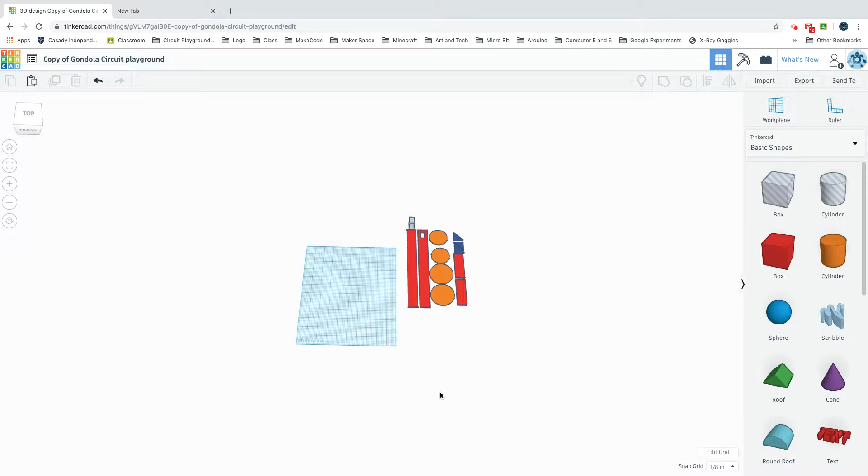All right, so this is a screencast on how to do the Tinkercad for your gondola. The first thing you're going to want to do is go into your edit grid, and you're going to want to change your units to inches.

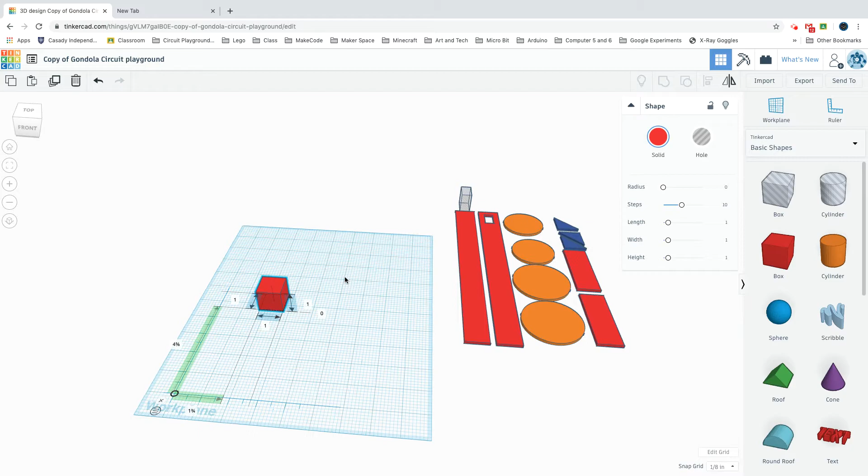Then I always like to drag the ruler in. That way, when you put things inside here, it gives you the dimensions right away. And since I need this to be laser cut, it's acting like it's going to be 1 inch high, but really it's going to be the height of the material. So in actuality, I like to change this to 0.1 for the height so that it's really small. Notice that you can click on these values right here and just type in the numbers that you need, which will be helpful later.

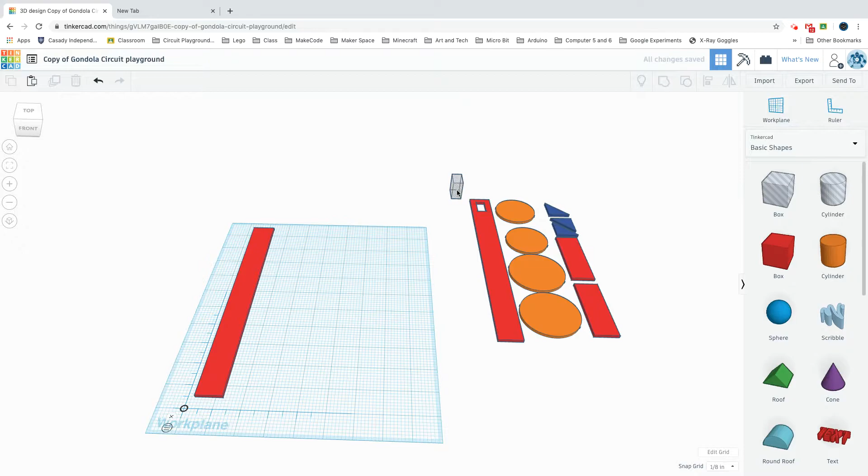So you need to make one of these that is 10 inches long and 1 inch wide. And then once you have that, you can make a small hole—those are over here, the box—or you can change it. These dimensions need to be 0.88 by 0.48.

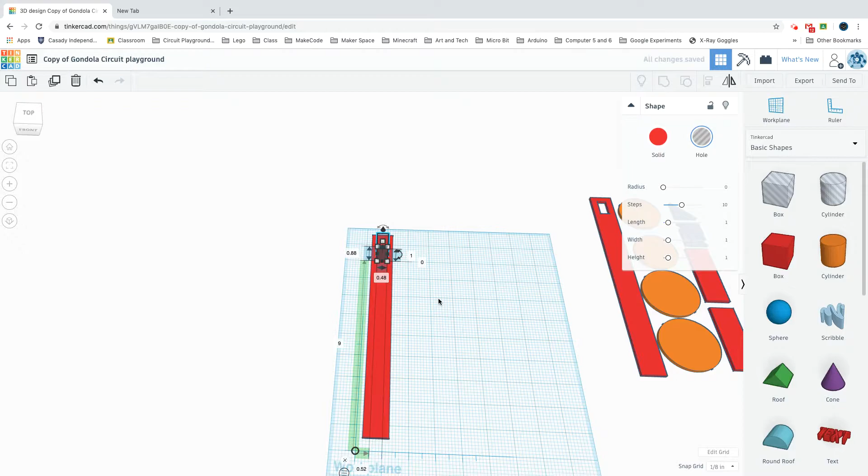And then to line it up, now you can hold down the shift key and the right click and move around like this. Or if you just hold down the right click, it moves you around like this.

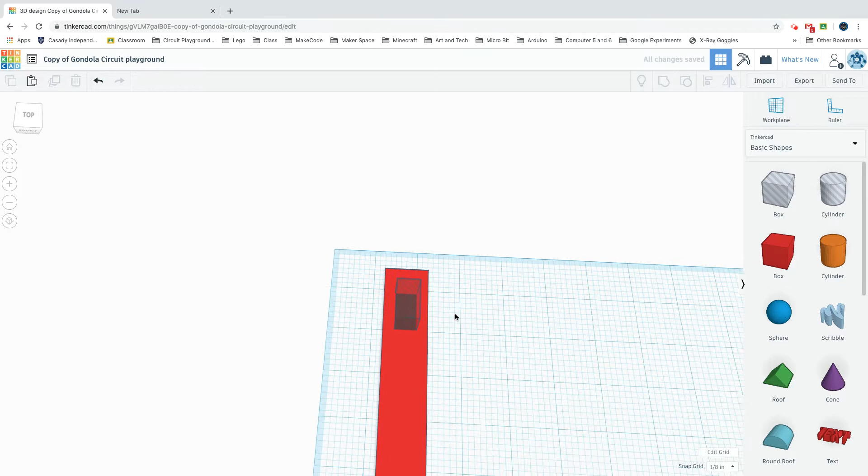And I'm going to come here and highlight these two, and I'm going to align them on the center so that it's where it needs to be. Then I'm going to give it a little bit of a gap here for that. And once I've done that, I'm going to group these together.

Once you have it grouped, you can hit the duplicate button and move it over, and now you have two of those. Then you're going to need to make a cylinder.

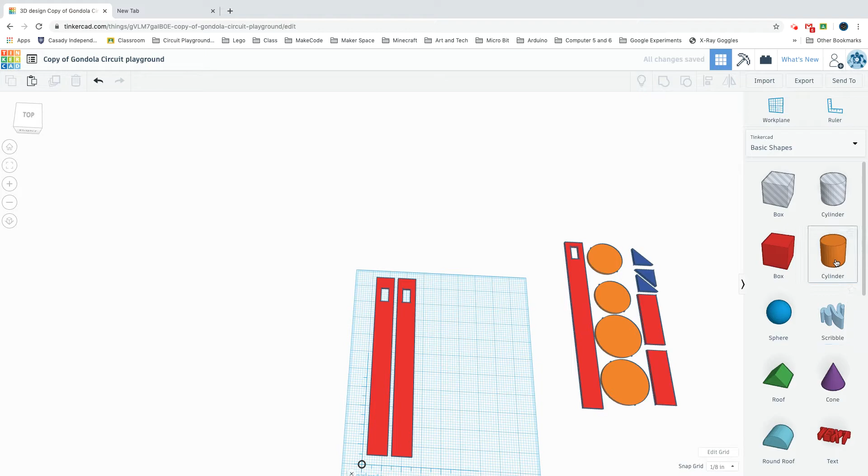When you drag in the cylinder, it's always a good idea to increase the sides up to 64. That way it's a smoother circle than what you'd have if you didn't do that. And then the dimensions on this, once again, I'm going to make it 0.1 high.

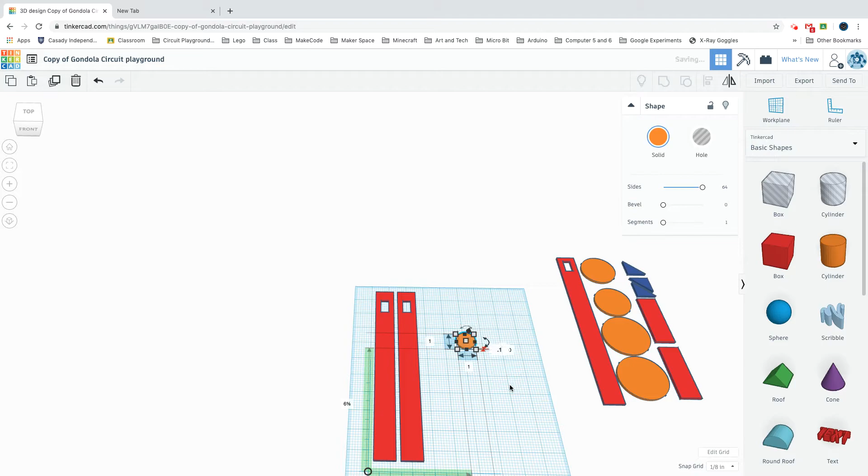And then you need two circles with the dimensions of 2.5 by 2.5. And then you need two more circle/cylinders that are 2 inches by 2 inches.

Then you need to make these, which are simply 1 by 3, and you'll need two of those.

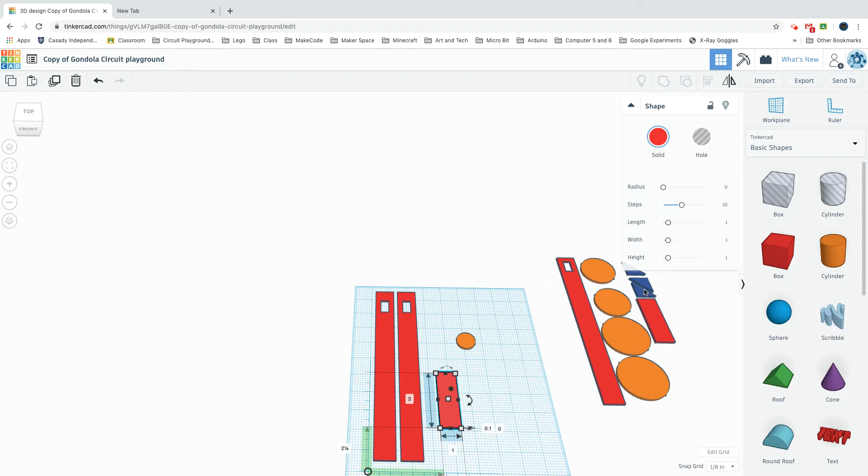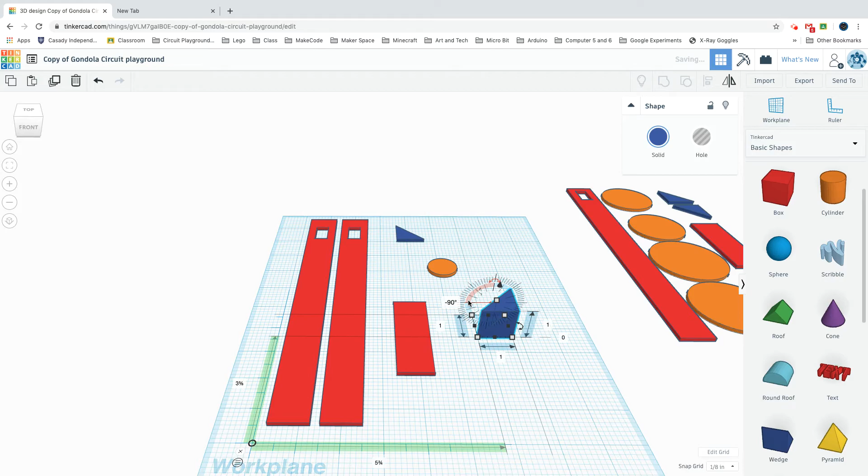And then you'll need to use the wedge to make the parts here. So you're going to drag the wedge in, and this one is oriented differently than what we're going to want. So we're going to need to rotate it 90 degrees, and that'll do what we need.

Now you'll just come in and make that 0.1.

Then once you have all that done, and you've made everything like I had over here, just get them all nicely put together so they don't take up that much space when you're cutting out your material from your laser cutter. And then you're finished.